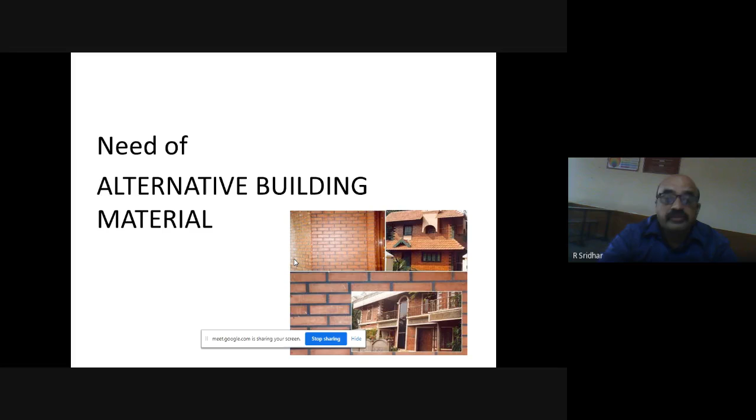So what is this alternative building material? What is the need for alternative building materials? There is a lot of demand created because everybody wants to construct their own residence, commercial buildings, commercial complexes, apartments, industry, all these things. For that, building materials are needed. But drastically, whatever natural resources are available, they are exploiting these natural resources for manufacturing building materials.

Unless you stop exploitation of natural resources... you already know what natural resources are, energy, solar energy, all these things, so I don't want to explain all this. Whatever building material you manufacture using natural resources, you have to stop or minimize that. You have to find an alternative route to produce materials using available resources, any other resources, or renewable ways. Renewable means you can use it later also, for recycling also.

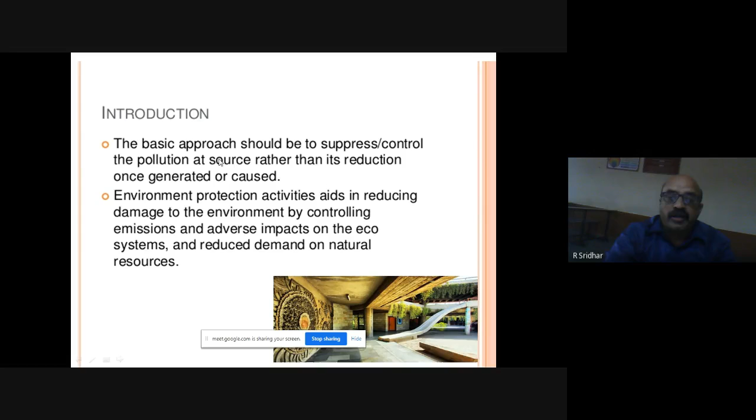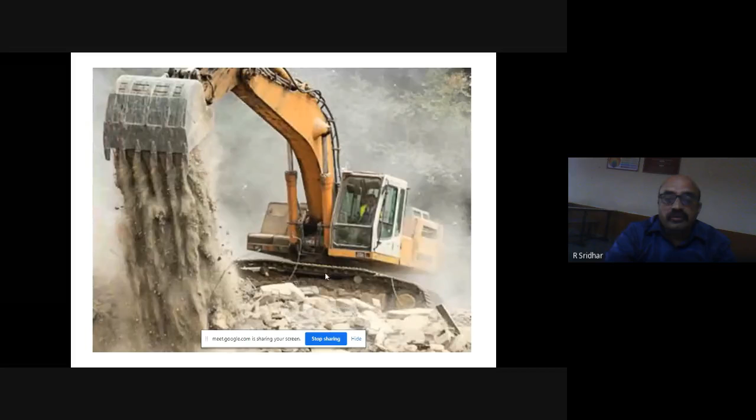So already you know how you are exploiting nature for our needs. For example, coarse aggregates. Bettahalasur, on the Yelahanka international airport road, already consumed a lot of resources for production of these aggregates. So you have to stop all these things. You have to find out alternative materials for building construction. Dust, dirt, you have to control all these things. You are taking out all the greenery from the environment. So you have to reduce the disturbance to the environment.

So you have to find out alternative materials for sand. Already found out; you are using so many materials. I will explain in the later slides. The research is continuing to find out further alternative building materials.

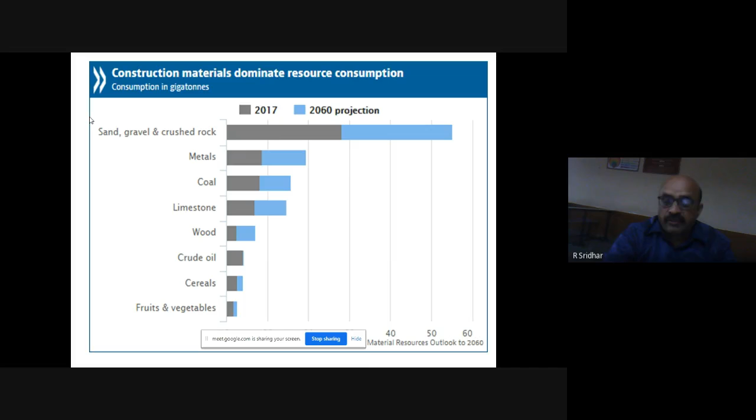So our policy should be to reuse whatever materials are there. If we cannot reuse the materials, you have to recycle. What is recycling? Recycling is a modification of the old material. If reuse and recycling do not happen, then you have to dispose of these things safely without spoiling the environment. This is the basic thing you have to learn: reuse, recycling, and disposal of material.

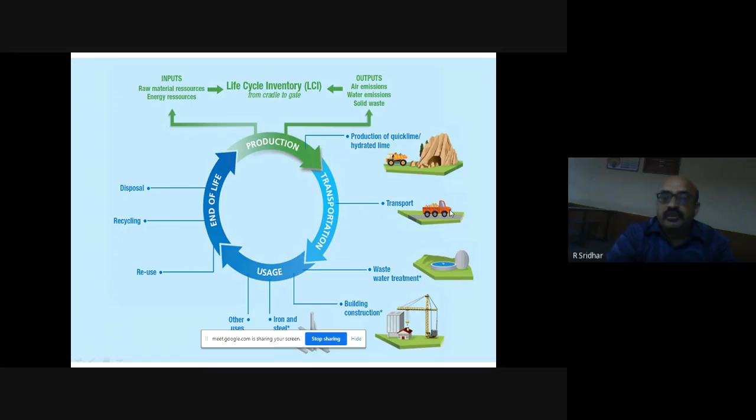So these are the segments. Transport: from transport also energy will be consumed. You have to reduce the transportation. How? You have to use locally available material for construction. That way we can reduce the transportation cost and also fuel cost.

consumption. Then because of overpopulation also, the need or the requirement becomes demand, it is increasing day by day. By that way, all the construction activities are geared up. So many buildings have been constructed. Because of building construction, materials are needed, and the materials come from nature only, from natural resources only. We are again exploiting the natural resources.

So it will cause us environmental impact. The environment cannot tolerate the continuous blow from us. So it will also show its action by tsunami, earthquake, floods, all these things. So you have to keep this in mind, you should not disturb the environment for our over consumption, for our over need. You have to minimize the use of resources from the environment.

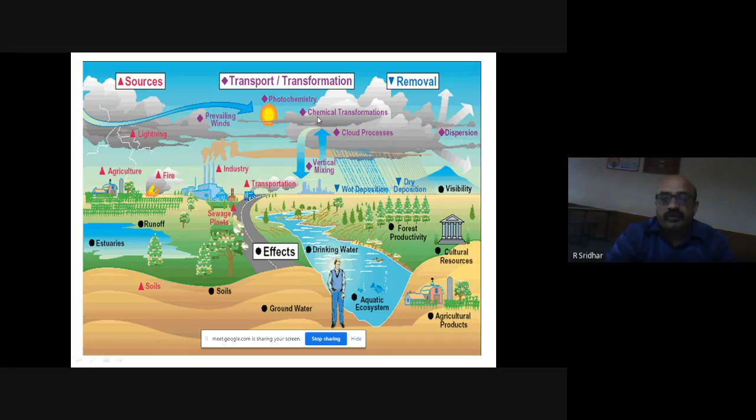So agriculture, these are all the different sectors using the natural resources. By that, the pollutants being produced are spoiling the drinking water. Then forest productivity, minimizing of forest productivity. Then also atmospheric effects, the bad effects of the industrial emissions, then fire, all these things. The environment is disturbed that way, so you have to minimize the resource consumption.

So all this fuel you are using, materials you are using for the construction. By the construction, again waste materials will form. By using fuel and materials, you are disturbing the environment. So climatic change will happen. So the period of rainfall will also be affected. So by that way, the ecology will be affected by this environmental resources exploitation.

So you can see here one of the areas in China, Beijing. This picture was taken when rainfall took place. Then afterwards, because of air pollution, smog has formed over the buildings in the atmosphere. So you can see the change in the clarity. This should not happen for these environmental aspects. This is not a good thing.

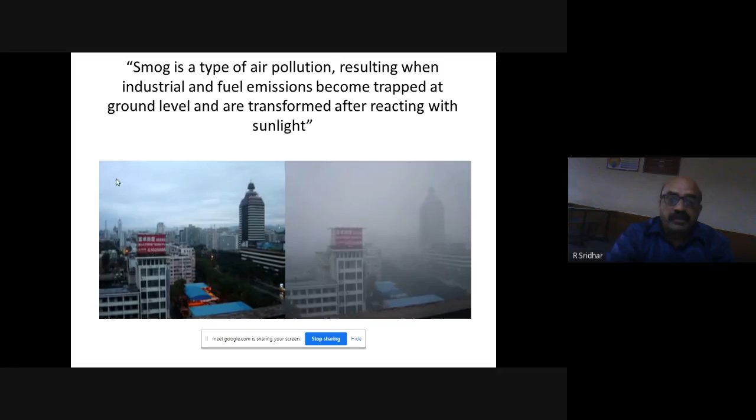So why am I explaining all these things? You should be serious to know how the construction activities are exploiting the environmental resources or natural resources.

So these are all the bad effects of the construction activities: ecological toxicity, poisonous things produced from construction activities; ecological degradation; then global climate change; then ozone depletion, the thickness of the ozone layer is reducing; then acidification, acid rain, I think you read in the newspapers and TV; then deforestation, then soil erosion,

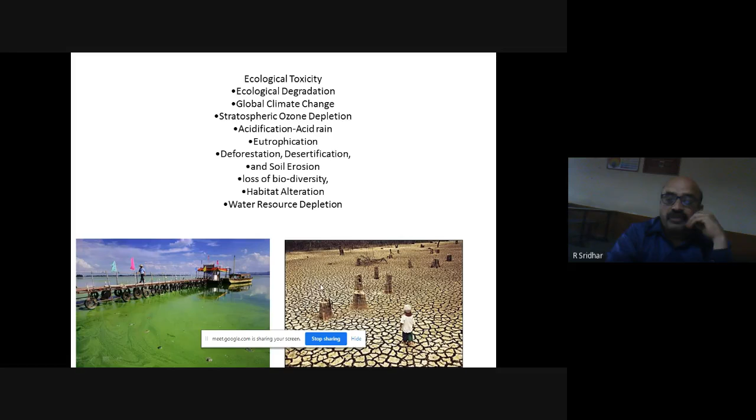then loss of biodiversity. So many animals and creatures are not there now, you already know all these things. Then water resources depletion, water pollution, air pollution, all these things. So this drastic change will occur as an after effect of all construction activities and exploitation of natural resources.

Then I will come to embodied energy. What is embodied energy? The embodied energy of a building material is whatever energy you used for the production of the building material, that amount of carbon consumed. In a simple manner, the energy consumed for the manufacture, extraction and transportation of the building material.

So you have to take into account whatever energy you spend for the extraction of the raw materials, then manufacture of the building material and also transportation of the building material to the concerned site. So types of embodied energy: initial embodied energy and recurring embodied energy.

The initial embodied energy in a building represents non-renewable energy consumed in acquisition of raw materials and their processing, manufacturing, and transportation to site. So whatever material comes to the site consumes the initial embodied energy. The initial embodied energy has two types: direct energy and indirect energy.

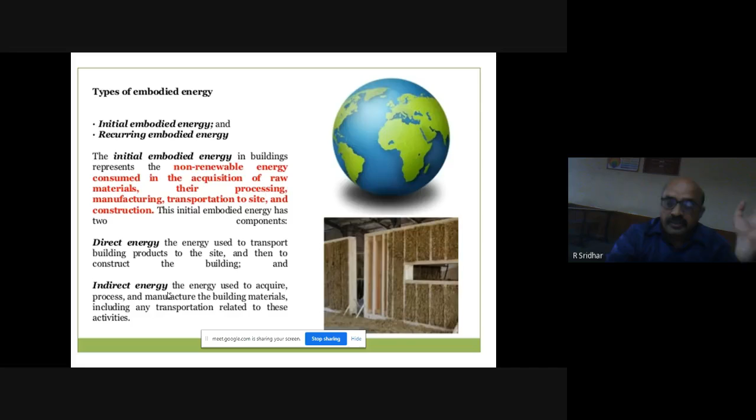Then recurring embodied energy. What is this recurring embodied energy? In a building it represents non-renewable energy consumed to maintain and repair. This is after the construction of the building. After the construction of the building, you will use energy for the maintenance, for the repair and restoration, to refurbish or replace materials, components or systems during the lifespan of the building.

So every building has its own lifespan. For a concrete building, before it was 100 years, now it is reduced to 60, 50 years. So to make it comfortable to live in for its lifespan, you have to maintain the building. If any requirement is there, you have to repair it, restore it, or replace the components of the building. So recurring means after the initialization, periodically you have to spend energy for all these things. That is called recurring embodied energy.

So how is embodied energy measured? Whatever the quantity of energy consumed for the production of the building material, it will be measured in megajoules or gigajoules per unit weight or per area. These are all complex things. You have to take all the aspects at the time of production of the building material, whatever energy is consumed, and carefully calculate the embodied energy.

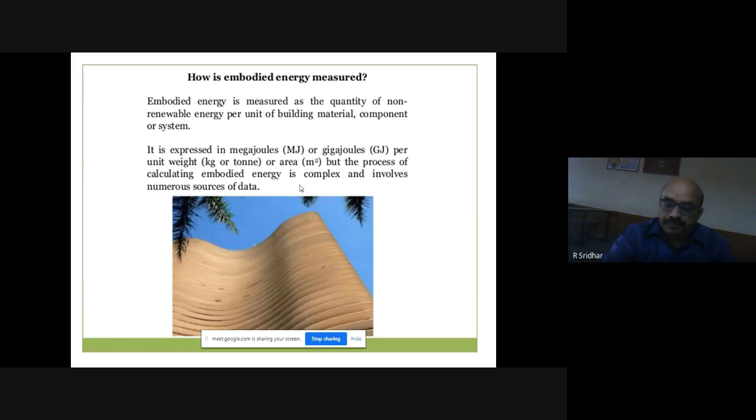So I already told the standard unit for embodied energy, megajoules per kg. Then the standard unit for carbon emission at the time of production, transportation, all these things, is carbon dioxide liberated or produced per kg of material. These are the gauges to measure the embodied energy and carbon emission.

So the choice of materials: how you have to choose the material for building construction. If you construct the building, what are the things you have to consider? Thermal properties of materials. Then structural properties, meaning compression strength, tensile strength, shear strength. Temperature resistant materials. Then the cost. Those three aspects you have to see, but the energy implication, that is embodied energy, minimum embodied energy in the material, you also have to consider for the construction of the building.

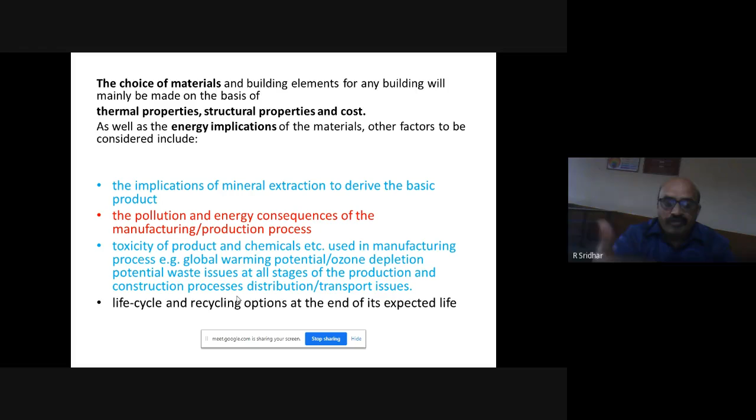So the energy consumption in the building occurs in 5 phases, 5 stages. The first phase, manufacturing of building materials and components, which is termed embodied energy. Already you know what embodied energy is. Then the second and third phases correspond to energy used to transport materials from the production plant to the building site. Wherever you produce the building material, you have to transport it to the construction site. So the energy used for transportation you also have to consider.

Then second and third, that one. Then fourthly, energy is consumed at the operational phase, that is, the service period of the building. Service period of the building, whatever the energy, that is maintenance, repair, all these things. That is the service period: energy used for maintenance and repair or restoring of the building.

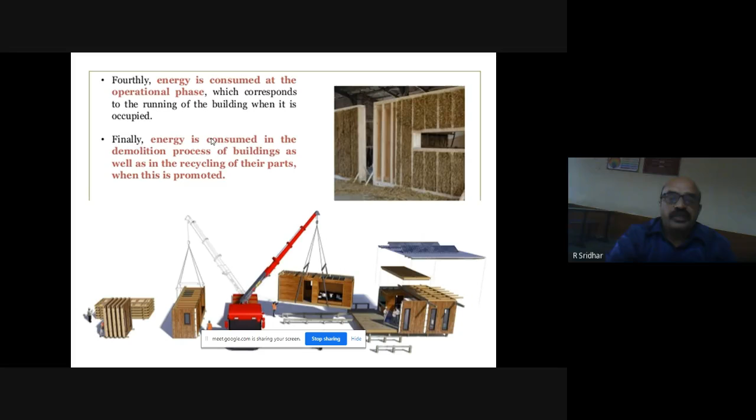Then finally, the energy will be consumed for the demolition of the building. Whenever the building life has reduced, if it is not fit for usage, that building should be demolished. Okay. So for demolition also, the energy will be consumed. So that is the fifth stage of energy consumption. So in the assessment of partial product life cycle, we have to consider all these things.

Again, I am repeating: extraction of raw material, transportation of that raw material to the factory, then manufacture of the product, then assembly of the product system, assembling some of the materials, that is furniture, all the things, then transportation to the construction site, then installation, then maintenance, replacement after the life of that material, then disposal of whatever material is not fit for use. For all these things, we require energy.

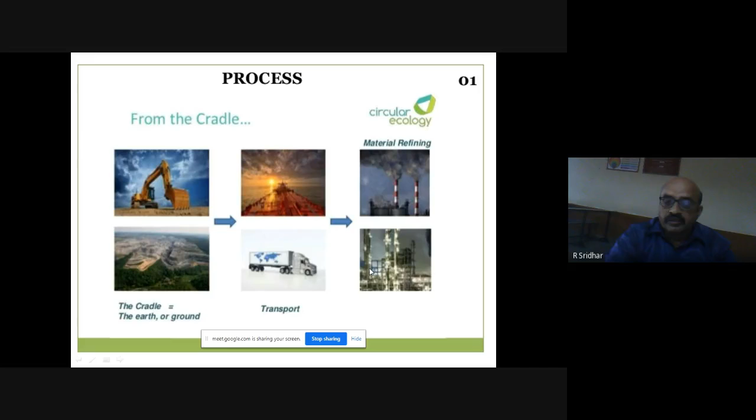So these are all the processes: extraction of the raw material, then transportation to the factory, material refining, then again to another factory for the finishing of the material, then packaging, then product formation, and then distribution by way of transportation to the construction site. Last it comes to the construction site. So for all these things, energy is required. So you have to calculate all these things.

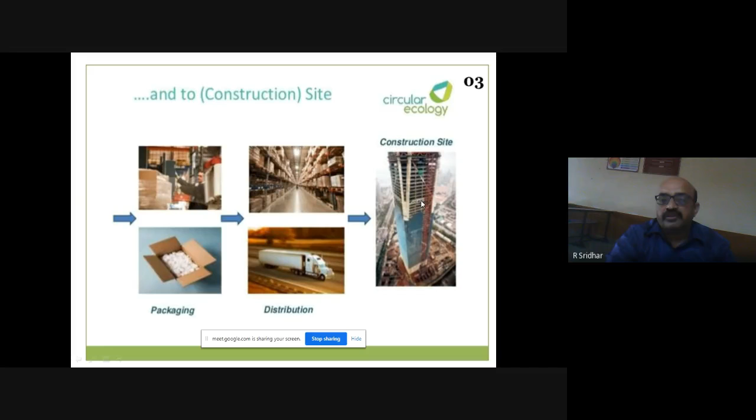You have to calculate. So by calculation of this embodied energy in the building, okay, embodied energy in the material is individual. For embodied energy of the building, you have to consider all these aspects, 5 stages. So these are all the different segments of the energy usage in the building.

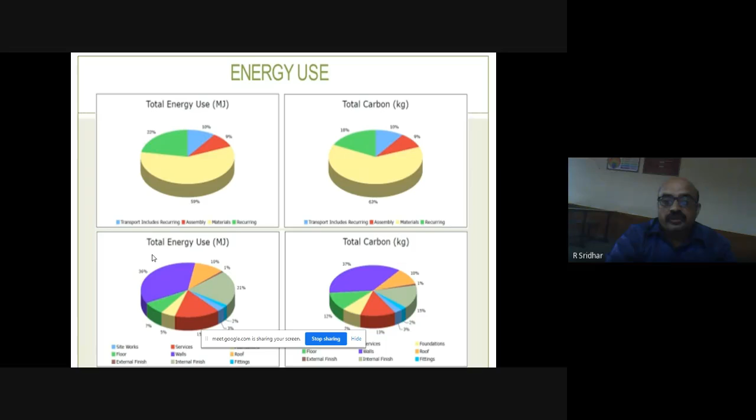So when selecting the building material, the embodied energy should be considered along with other parameters: the durability of the building material, whether it is durable compared to alternatives, then how easily the material can be separated. In a steel structure, you can separate the beams, columns, slabs, panels, all the things. In precast also you can separate it. So the question is how easily you can separate the material.

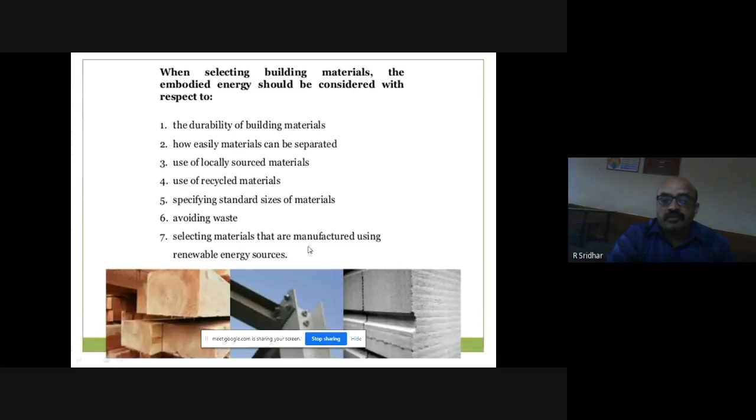So whatever the building materials that will not produce waste, or produce minimum waste, you have to select that building material. Then select the building materials that are manufactured using renewable energy resources. Renewable means the alteration of energy from one form to another form; you have to consider whether that specific material has that option or not. All these things are important for building construction or selection of the building material.

So the comparison has been given for the carbon emission of three common building materials to understand the scenario of carbon emission. Please note that the data are based on metric tons, 1000 kgs. So 0.2 metric tons of carbon emission will be from concrete production. For wood, 0.4 metric ton carbon emission. For steel production, it is 2 metric tons. So first we have to find an alternative material for steel because it emits more carbon to the environment. That is not a good sign.

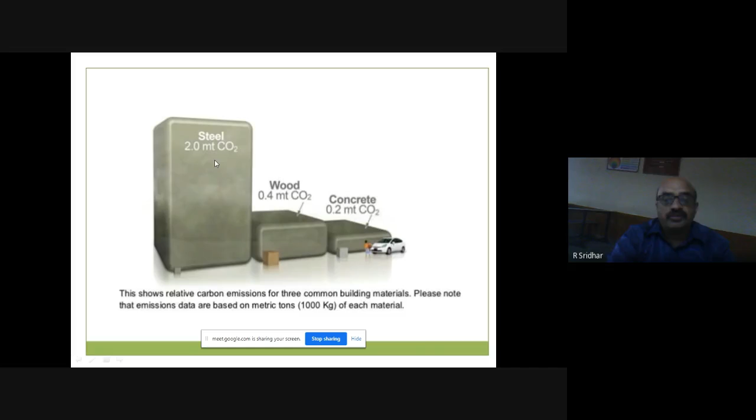So carbon dioxide in construction: embodied carbon dioxide emission arises from creating, maintaining and demolishing the asset, the materials and also the building. There are two stages. Embodied carbon dioxide emission at the time of creation, maintenance and demolition of the asset, and operational, which means whatever carbon dioxide emission takes place during the service period of the building. Okay.

Then we have to look for sustainable materials for the construction of any structure. What is sustainable material? It is any material that can be put to effective use in the present without compromising its availability for use by later generations. The simple meaning is, we have to exploit natural resources because there is no other way, but we have to minimize the exploitation of natural resources. At the stage of production of the building material, we have to minimize the raw materials taken from nature.

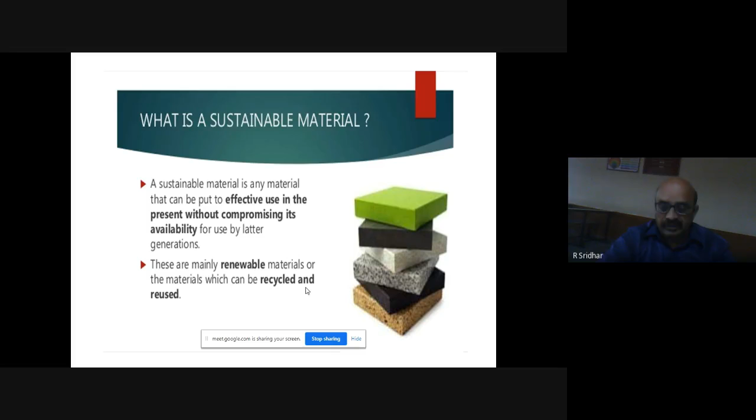So it is the practice of increasing the efficiency with which buildings use resources, energy, water, and materials while reducing the building's impact on human health and the environment. For an eco-friendly building, you have to use natural resources, that is energy, water, and materials, in the correct way. As the earth's population increases, you have to construct more and more buildings and infrastructure, so you are exploiting the environment. You should avoid this. So the green building concept arrives because of all these things. Green building materials can help create more sustainable, healthful, and ecologically sensitive buildings.

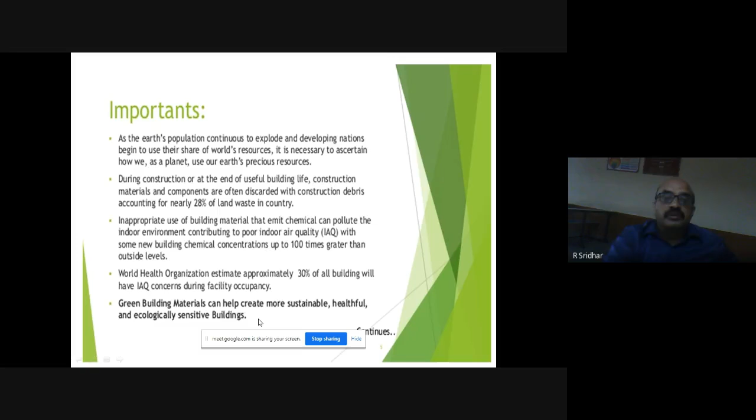So you have to minimize the use of natural resources, raw materials. Then we have to adopt the green building concept in the building. Then pollution should not take place; you have to minimize the pollutants.

Then guidelines for reducing embodied energy. What things do you have to follow to reduce embodied energy? Design for long life and adaptability using durable and low maintenance materials. Low maintenance materials means the energy used for maintenance is minimized. Ensure materials can be easily separated. As I already explained, damaged components you can refix and reinstall easily, and you have to minimize waste materials. Then modify instead of demolishing or adding; demolition is the last option. You have to modify or restore the building.

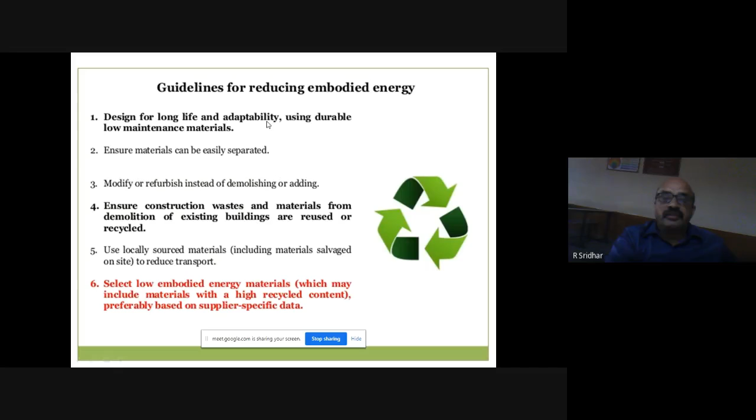Ensure construction waste and material from the demolition of existing structures are reused and recycled, use locally available materials, select low embodied energy materials. These are all the guidelines to reduce embodied energy.

The things are put in different forms, okay, same meaning in the elaboration form. So some of the materials can be reused, some materials in their form can be reprocessed. Aluminum can be reused again for construction purposes. The embodied energy percentage for reuse is more, for reprocessing it is less. In the case of steel reinforcement and glass products, reprocessing is less.

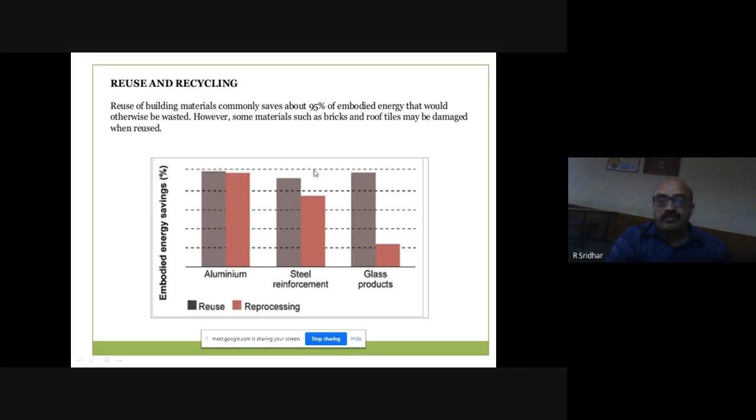Reuse of building materials commonly saves about 95% of embodied energy that would otherwise be wasted. So you have to reuse the building material, and take the benefit of that building material already used second hand. We will call it second hand building materials in general words.

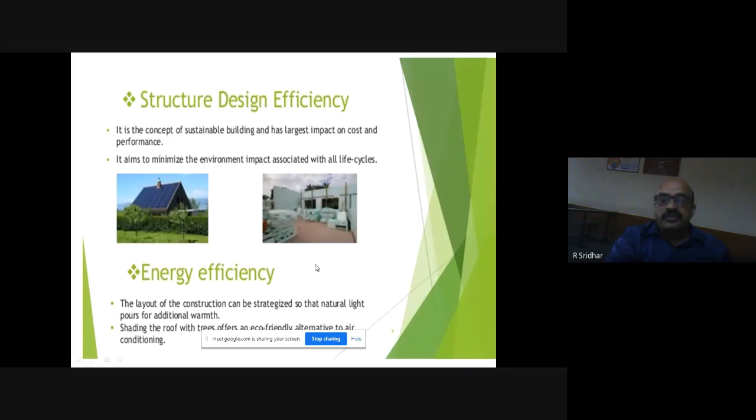Then energy efficiency: natural light and air should be available for the building without using electricity or other forms of energy.

Then water efficiency: rainwater harvesting, all these things you have to adapt in the building. Then waste water management - whatever waste water is there, you have to recycle it and reuse it for gardening and other things. That is water efficiency.

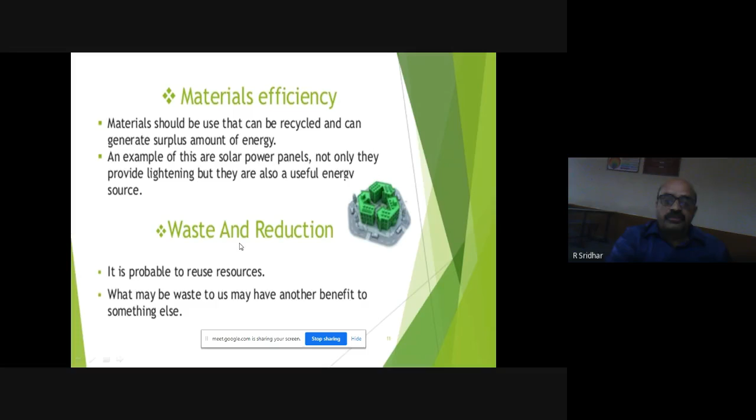Then material efficiency: reuse and recycling of the material. Waste should be reduced at the time of construction only - you have to reduce that.

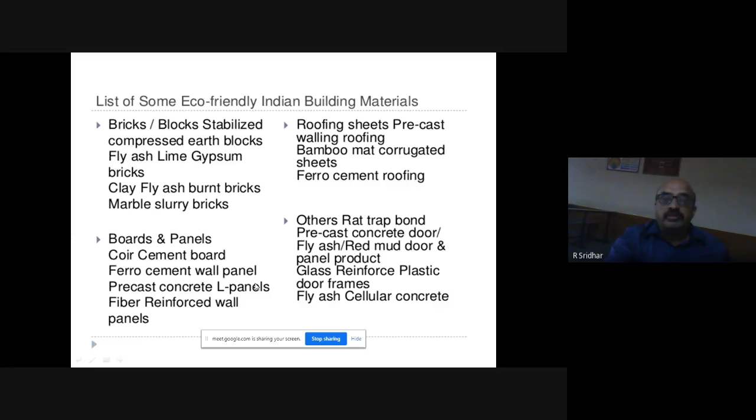So what are the green building materials? We'll go directly into it: bricks, then blocks, stabilized compressed earth blocks. Wool bricks - by wool, we produce the bricks.

These are the advantages: 37% more strength than the burnt brick, and it is resistant to cold and wet climate.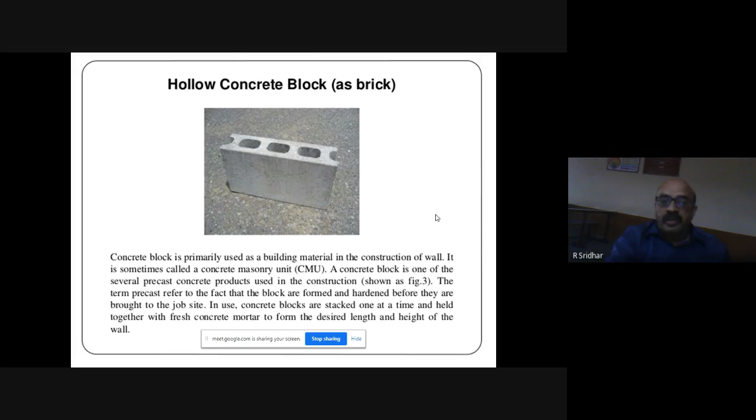Then hollow concrete blocks - already you are using it, concrete blocks. This has got a good finish, and it is also cost effective, with low maintenance cost, and can be used for outdoor elements. It is load bearing, has got good strength, fire resistant, thermal proof or sound proof, economical, and environmentally friendly, because fly ash, the waste material, is used as a raw material in this one.

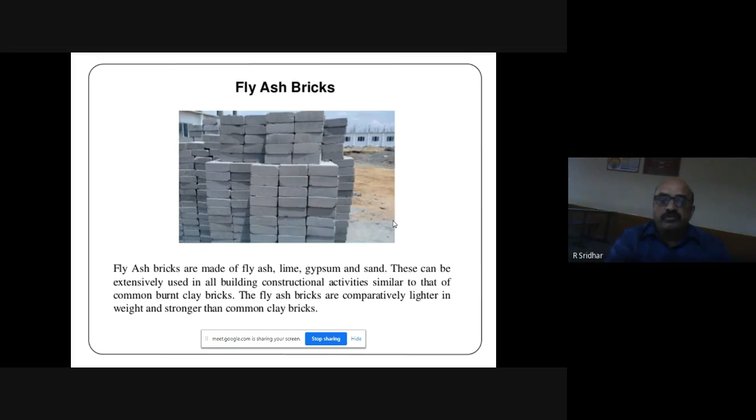Fly ash bricks are also available. These are all alternative building materials you can use for the building instead of the conventional thing. Advantages: construction saves construction cost, less water seepage, less energy consumption.

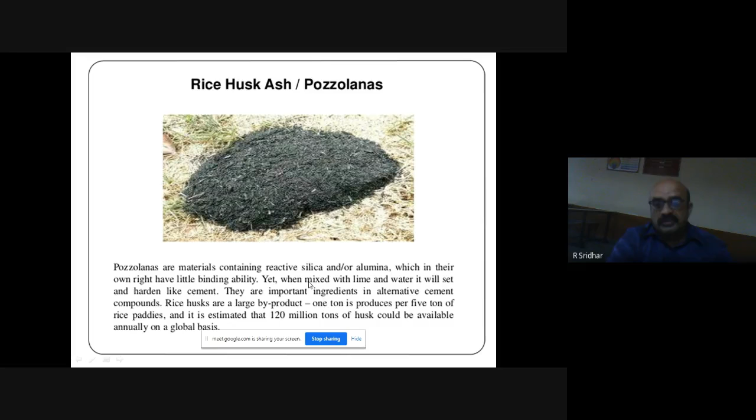One more material used for the production of concrete and mortar is rice husk ash. Rice husk ash is a byproduct - 1 ton is produced for every 5 tons of rice paddy. It is a waste material, you can use it as a pozzolana. Pozzolana means a cement-like material, an alternative material instead of cement. You can use rice husk ash in some percentage in the concrete.

Then sustainable concrete by using crushed glass, wood chips, and other materials for the concrete, instead of regular or conventional coarse aggregates and fine aggregates. So there are replacements for every material - for the cement, for the coarse aggregate, for the fine aggregate, replacement is there. Then paper from cardboard, you can use it too.

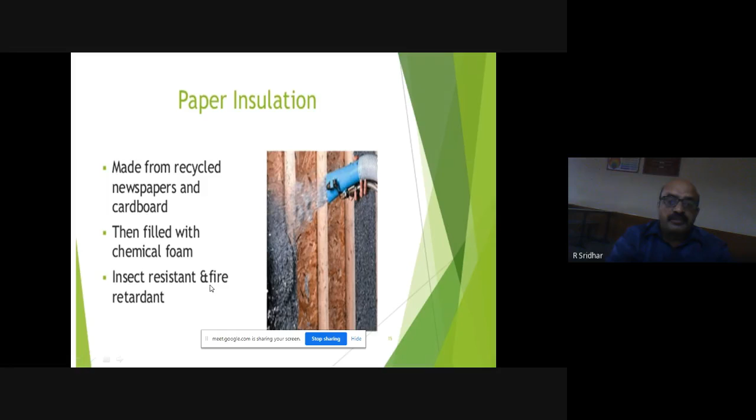That is insect resistant, fire retardant. Some of the advantages. Then one more material, ferro cement, is there. Ferro cement has got the components: cement mortar mix, skeleton steel, and steel mesh.

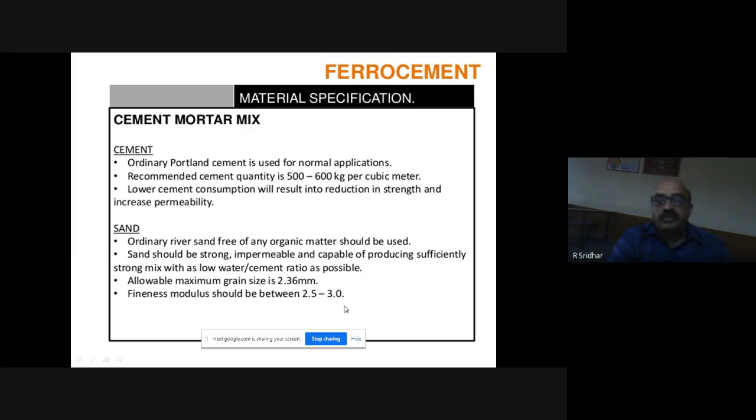These are all the cement mortar mix specifications. Ordinary Portland cement should be used. Sand should be ordinary river sand. Allowable maximum grain size is 2.36 mm. The fineness modulus, already you know from the BMT lab, should be 2.5 to 3 for sand.

Then admixtures can be used. The admixture, already you know, is the fifth ingredient for the concrete or mortar. It gives more workability and strength, and also gives a special property to the concrete or mortar. That is called admixture - plasticizers, super plasticizers.

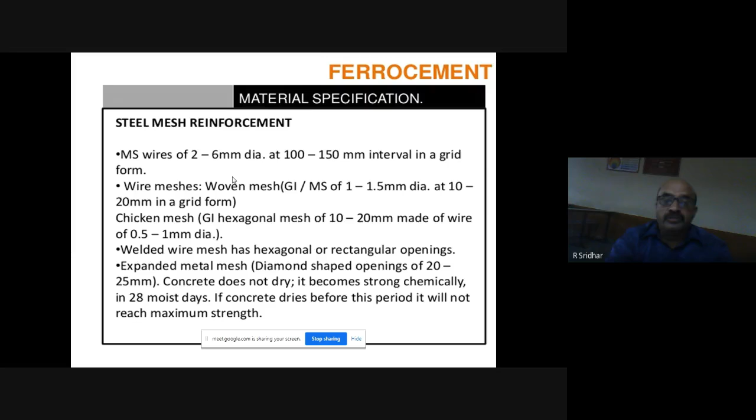Then skeleton steel will be used, and steel mesh will be used. These are the specifications. These are all the types of wire mesh used as reinforcement for the ferro cement.

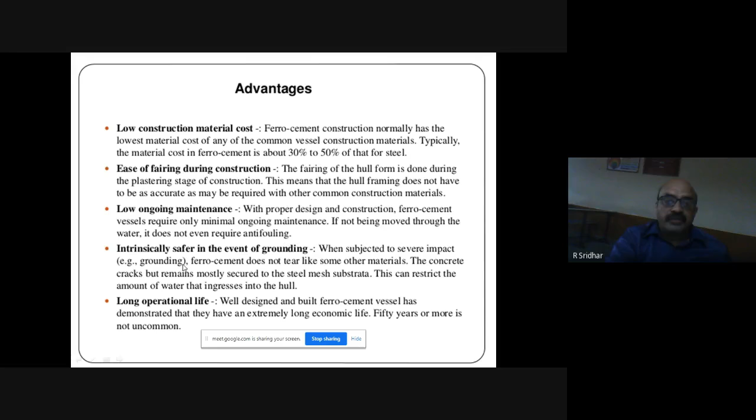So what are the benefits of ferro cement? Low construction material cost, ease of construction activities, low ongoing maintenance, safer, and long operation life.

Then also one more material, the ferro cement - I think some video is there. Afterwards you can see that one.

Then tire veneer is the flooring material. Tire veneer - whatever waste tire material is there, we can make it into a mat. You can use it as a flooring material.

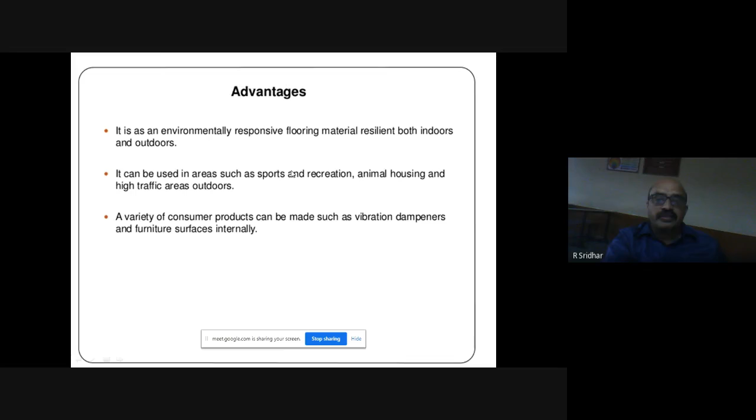Then advantages: it is an environmentally responsive flooring material. Okay, then it is also durable.

So I have to go fast. I think I have to finish it at 1:30 or 1:15.

Okay, reinforced fiber concrete. So I think it will take time, the video - reinforced.

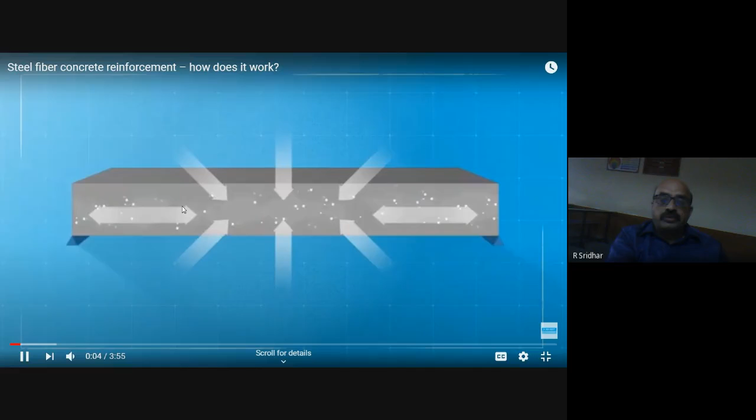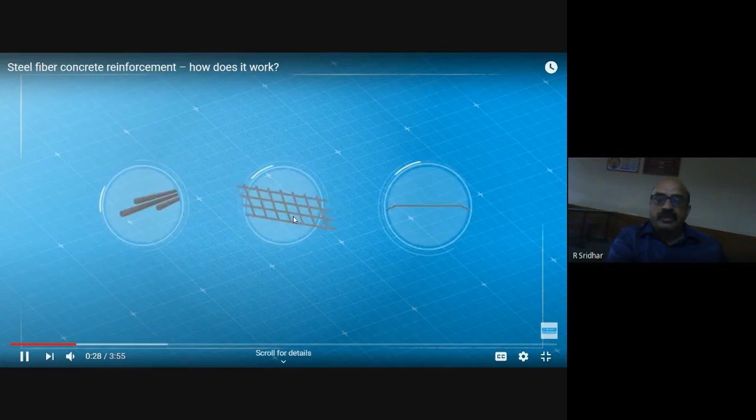So this is conventional concrete. It has to take tensile stress, compression stress, all these things. If you reinforce it, this conventional concrete will be more powerful than conventional concrete. How? By using different types of fibers. Different types of fibers can make the concrete more durable, and it will take more stresses very effectively.

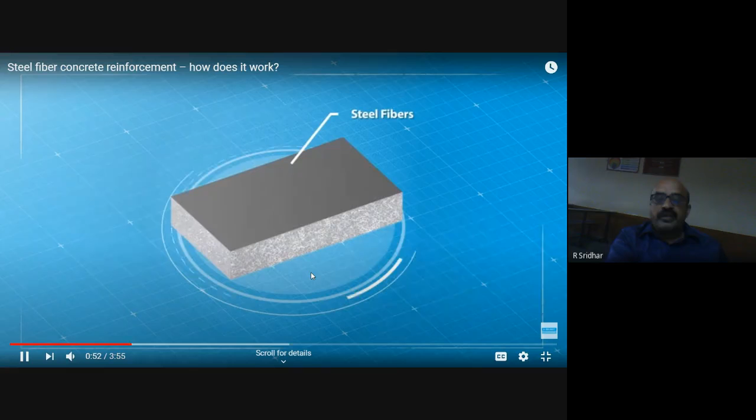So this is the mesh form of reinforcement. Then some steel fibers also come in fiber form or mesh form. The material will be sandwiched, reinforced within the concrete. This is mesh form - whenever the load is applied, it will be flexible enough to take that load.

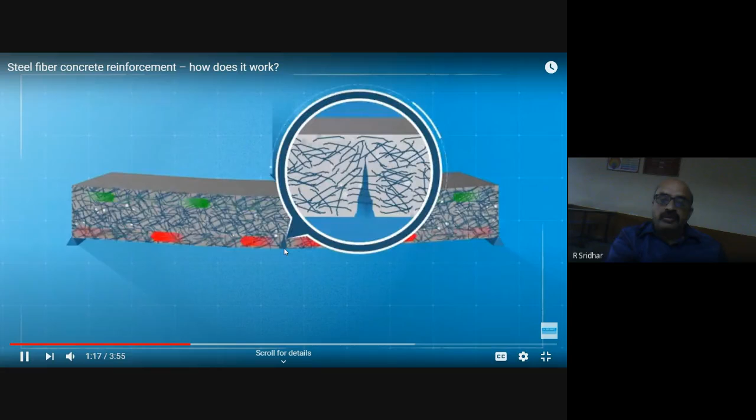So whatever stresses are there, it should take them effectively. In conventional concrete, cracks will take place. If you use fiber reinforced concrete, you can minimize the formation of cracks.

Next, properties of fiber.

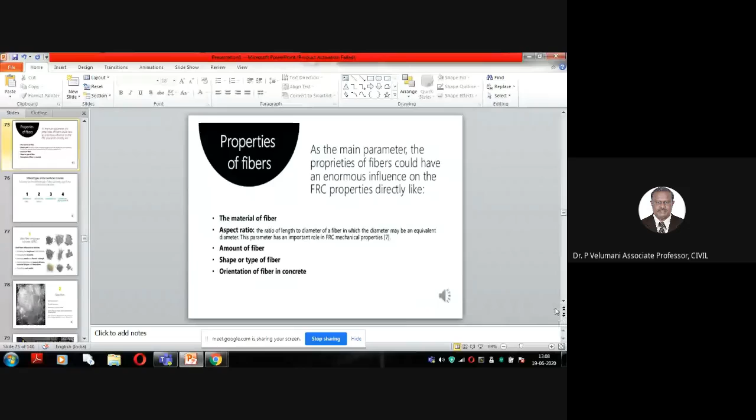So these are the properties of fibers: aspect ratio, amount of fibers, shape of the fiber, orientation of the fiber. All these things will affect the strength or performance of the fiber reinforced concrete.

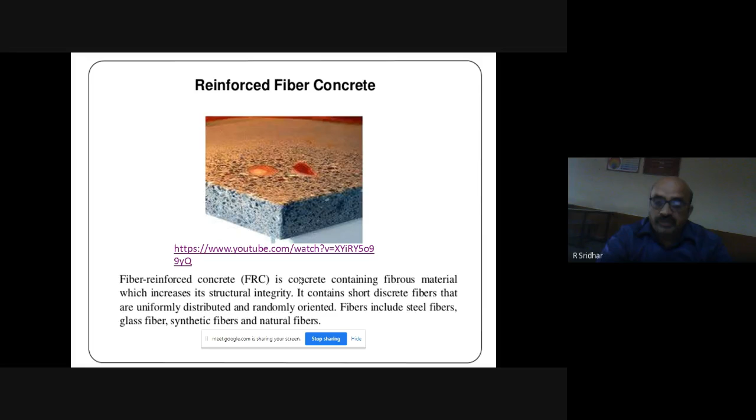Fiber reinforced concrete - what is fiber reinforced concrete? Some fiber materials will be used in required form, fiber form or mesh form - that is called fiber reinforced concrete. It may be steel fiber. I will show all the things. There are different types of fibers, mainly steel fibers is one. It has got more toughness and is also costlier than the other fibers.

Then glass fibers are also available. Then asbestos fibers.

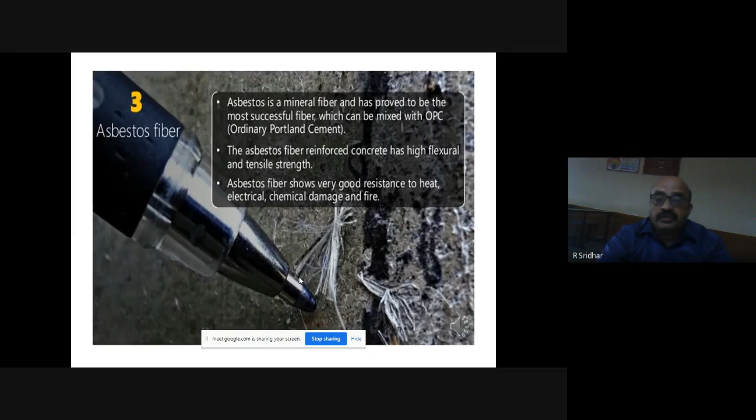Synthetic fibers are available, and also natural fibers are available, like coir and jute, among other things. So what is the benefit of this fiber reinforced concrete?

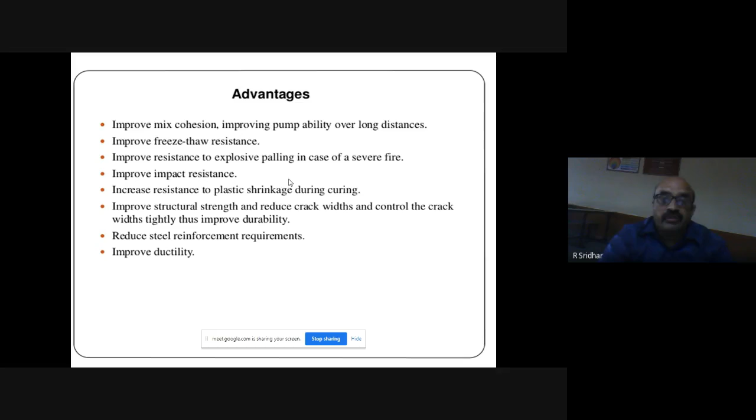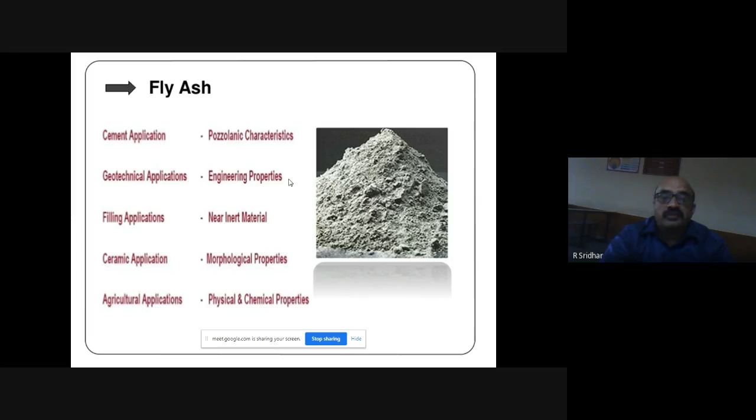Then fly ash, it is also one of the materials, a waste material. You can use it for construction activity, for materials production like blocks and also concrete. These are all the advantages.

Then bamboo - yes, there's a video on this, I don't want to repeat it. Anyway, this is the bamboo material. It will be used as reinforcement in the building. So, selection of bamboos - not all types of bamboo can be used. There are 1,500 species of bamboo, but only certain species can be used for the construction process.

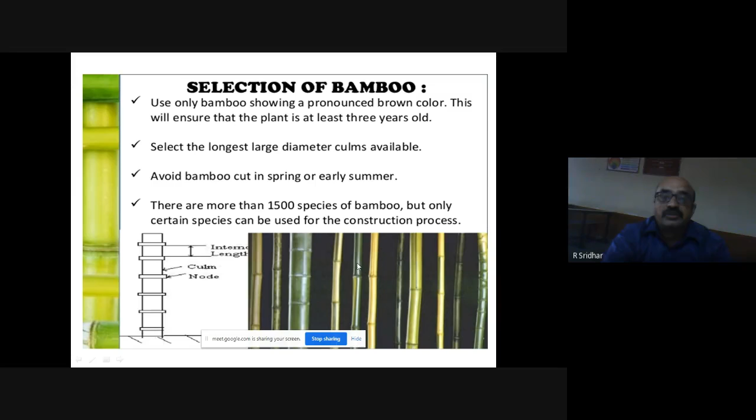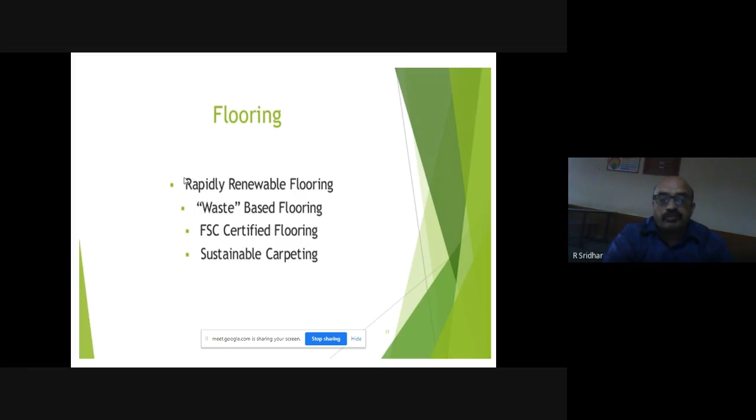Alternative materials are available, made from waste materials, flooring tiles have been produced. And for flooring, as I already told, bamboo can be used. Wool form or carpeting form will also be used for flooring purposes.

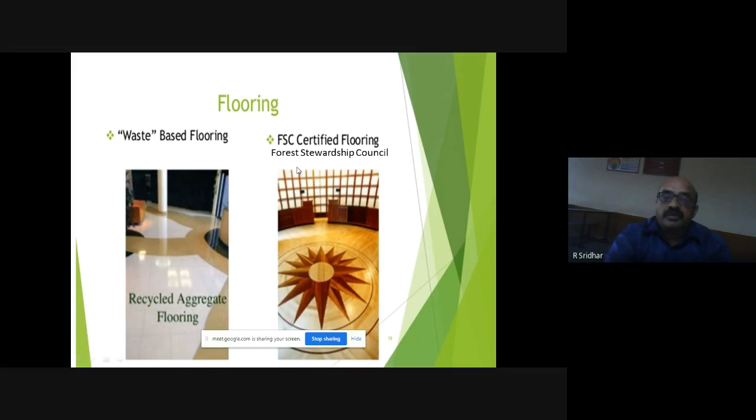Waste-based flooring, Forest Stewardship Council certified flooring - whatever guidelines are available from the Forest Stewardship Council, if the material follows those, then it is called FSC certified flooring.

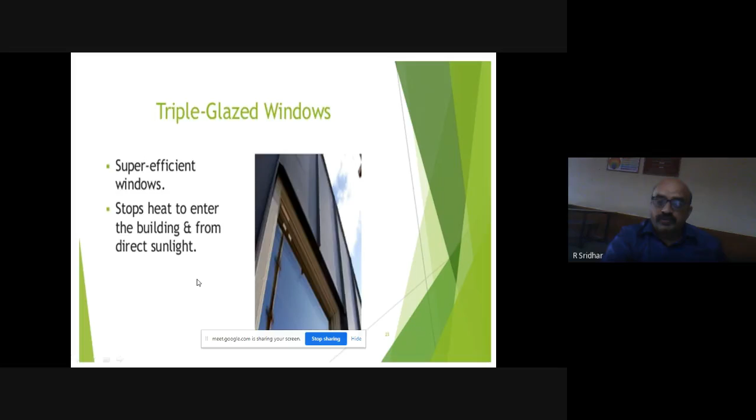You can control health hazards with clay plaster also. Then for wall finishes, different types of environmentally friendly finishes and natural paints are available nowadays. Research is still going on for further requirements, for special requirements. Then triple glazed windows - these are all alternative building materials for special purposes, an alternative to wood.

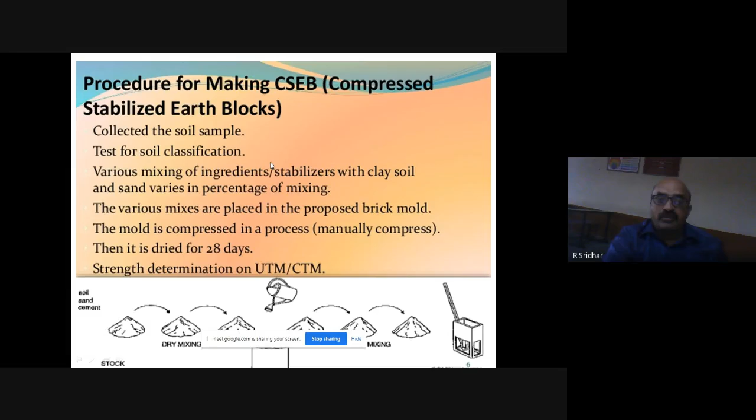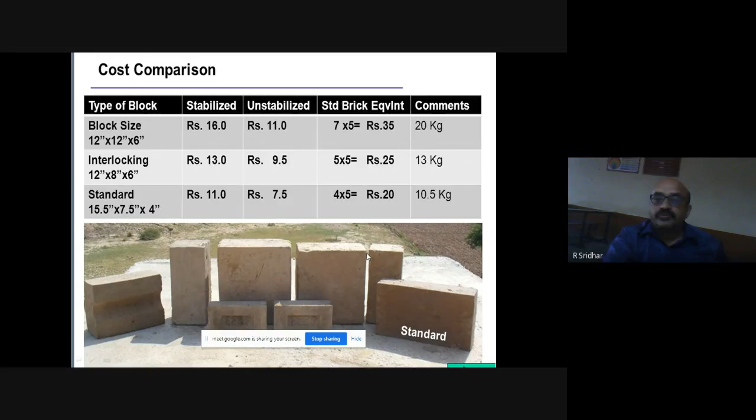Then fly ash burnt bricks is also one type of brick available. Then marble slurry bricks, ferro cement wall panels, then rat trap bond - there will be a trap or hollowness between the bricks or blocks, which is called rat trap bond. This reduces brick consumption by 25%. Using the rat trap bonding system can reduce brick consumption and mortar consumption, and it has good thermal performance, with equal strength and stability compared to the conventional system.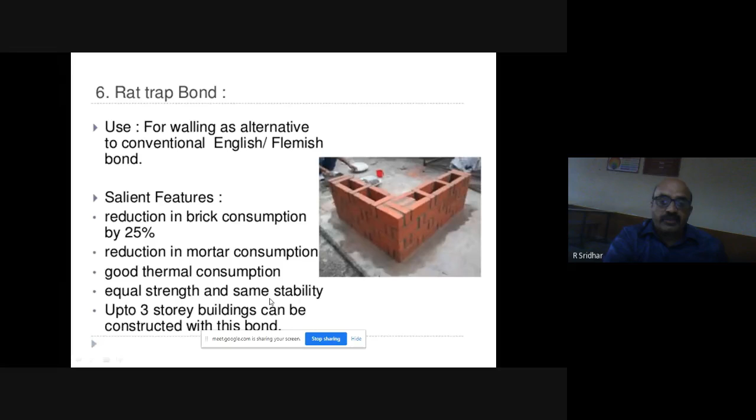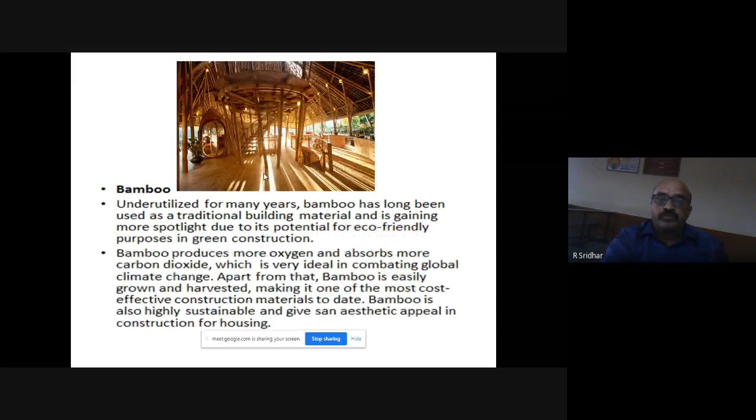Then concrete roofing tile - instead of mangalore tiles, you can go for concrete roofing tiles, because mangalore tiles consume more firewood during production, causing exploitation of forests, which can be reduced by using concrete roofing tiles. Cement is still used this way, but if you use alternative cement materials, you can produce concrete roofing tiles. Ferro cement roofing tiles are also available. Then bamboo mat boards, bamboo material for different purposes, bamboo roofing sheets. And here a two-story building has been compared using an eco-friendly structural system versus a conventional structural system.

So there will be a reduction in the cost and also it is eco-friendly. You will achieve two things: one is eco-friendly, another one is cost reduction in the construction.

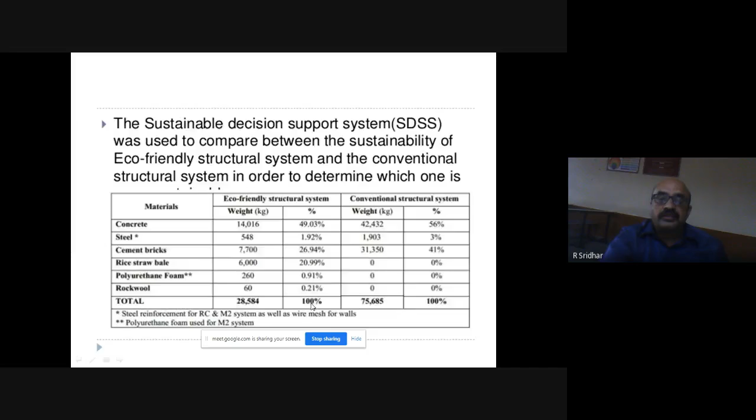Then for frame structure, RC frame structure is the conventional one. For alternative materials, hollow blocks, fly ash blocks, you can use. For sloping roofs, instead of Mangalore tiles, concrete and precast, all other things can be used.

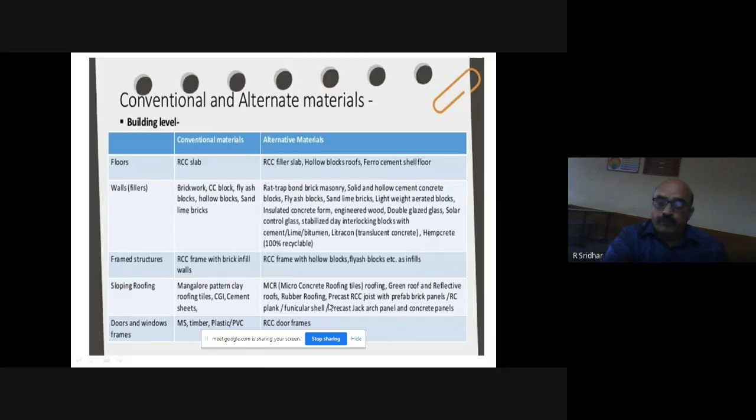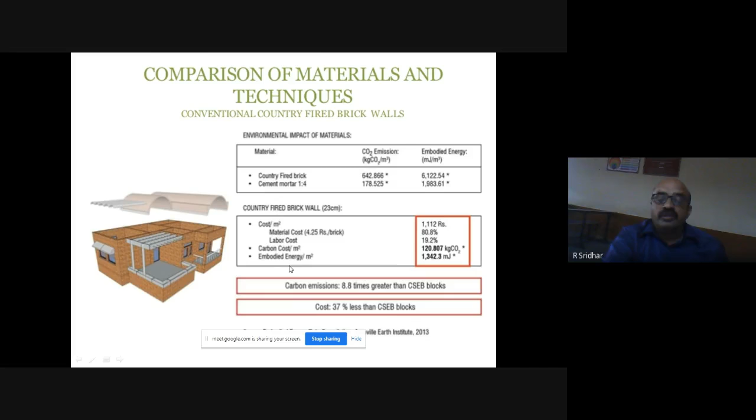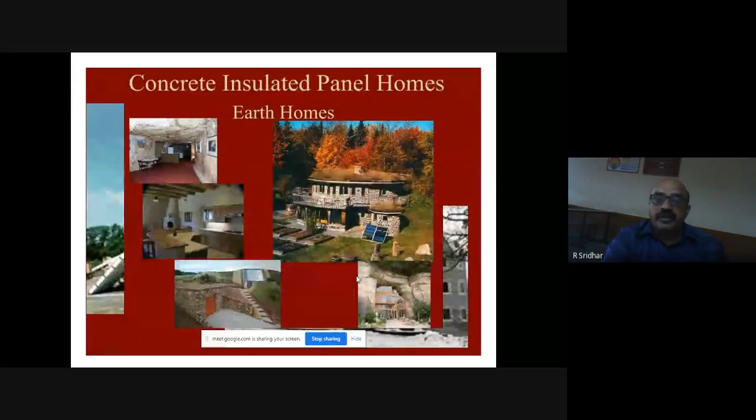So these are the different alternative building materials and building techniques: straw bale house, concrete insulated panel homes, earth homes, rubber tire house. This is cheaper. Then earthship house. This earthship house is nothing but whatever waste materials are available, they will be used in the construction of the building. So these are all earthship houses.

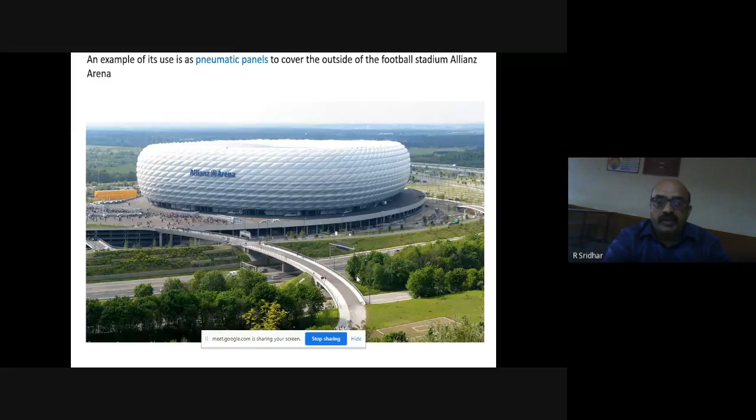This is pneumatic panels. This building or structure uses pneumatic panels. Pneumatic panel is nothing but compressed air used in the material. This is ethylene tetrafluoroethylene material used in one of the buildings in Germany. In short form it is ETFE, and it provides excellent heat and chemical resistance.

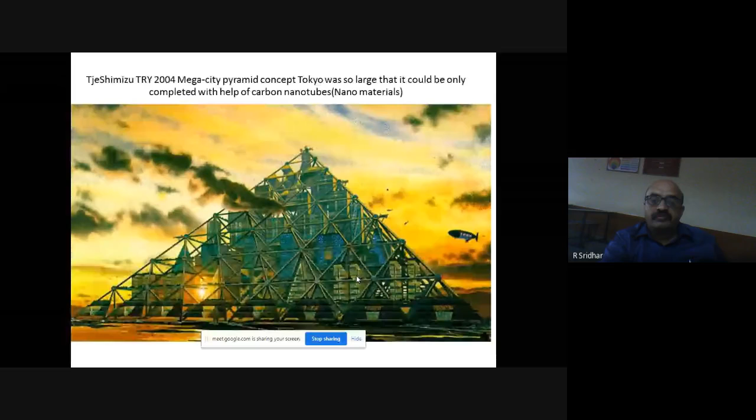Then this one is a nanomaterial structure. Then self-healing concrete. Self-healing concrete means whatever cracks form, the building component or wall component itself will take care of it. It will avoid the formation of the crack and patch the crack. When water seeps through, it can avoid cracking caused by water and chemicals. Cracks form because of chemicals and water intrusion into the structure.

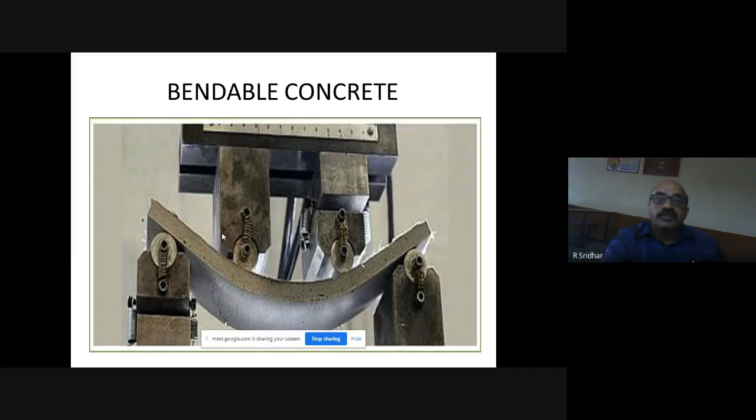Then bendable concrete is also available by using special material for the concrete. Then sweating rooftops. Sweating rooftops means one layer of the rooftop absorbs water when it rains, and afterwards, whenever the temperature of the building rises, it releases the water. That way it gives a cooling effect to the floor or other components of the building.

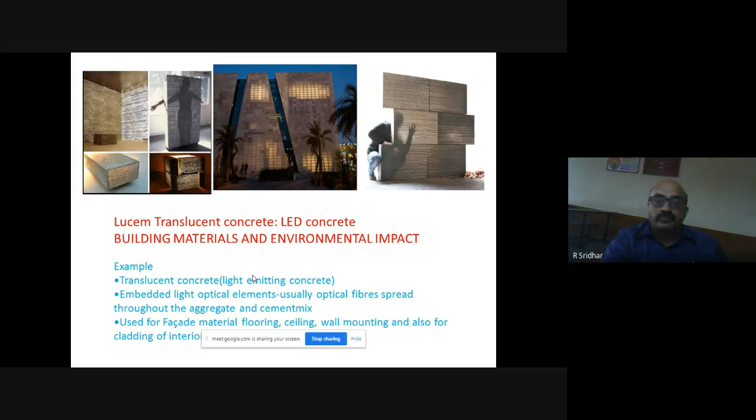These are all the different applications of alternative building materials: transparent, translucent concrete, LED concrete, photochromic glass, thermochromic glass, then electrochromic technology, then opaque technology. In the dressing room, whenever it is required, it will switch from transparent to opaque.